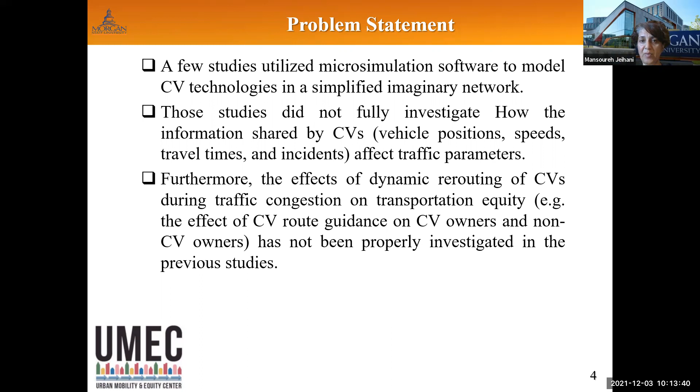So our objectives are to develop, and we already did, and calibrate a microscopic traffic simulation model in AIMSUN traffic simulation software to replicate a fairly realistic behavior of CVs in the traffic simulation environment. Driving behavior of CV guidance with various market penetration rates, from 0% all the way to 100%, and various traffic conditions is simulated, and the system-wide effect of CV-equipped vehicles with route guidance features on mobility and equity is analyzed.

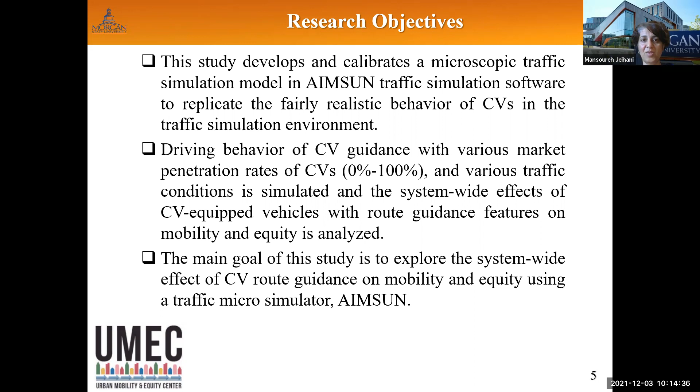And we need to mention that the main goal of this study was to explore the system-wide effect of CV route guidance on mobility and equity, and we used AIMSUN traffic simulator. So now the literature review, my PhD student Ali Reza is going to present.

Hello, everyone. Regarding the literature review section, more than 95 references regarding connected vehicles' effects on traffic parameters, emission, and equity were reviewed in our research. Various scientific databases were considered. All the relevant studies after 1990 were reviewed. The objective, methodology, outcome, and gap of each research were determined. And finally, based on the previous studies, a new methodology for analyzing network-wide equity was proposed. Please, next slide.

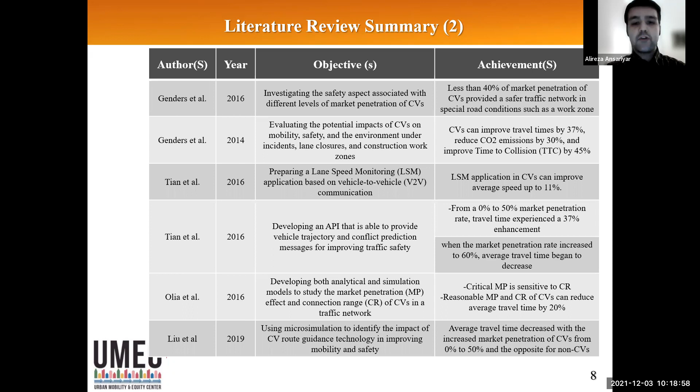Finally, after reviewing the mentioned studies, the following limitations were extracted from the previous studies. Market penetration rate and information update intervals were just considered, and gradual deployment of market penetration rate of CVs and information update intervals, for example, different time intervals for updating the average travel time on the network, such as 30 seconds, 1 minute, 2 minutes, 5 minutes, has received less attention. In our research, sensitivity analysis of network-wide level average travel time was investigated through different time intervals.

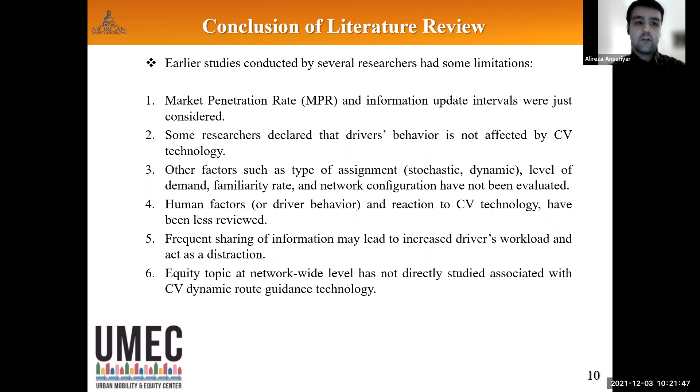And the main achievement of our study is investigating equity at the network-wide level. It means that different total volume demand matrices were considered. The network-wide level changes of average travel time with gradual deployment of market penetration rate of CVs from 0% to 100% were analyzed in our research.

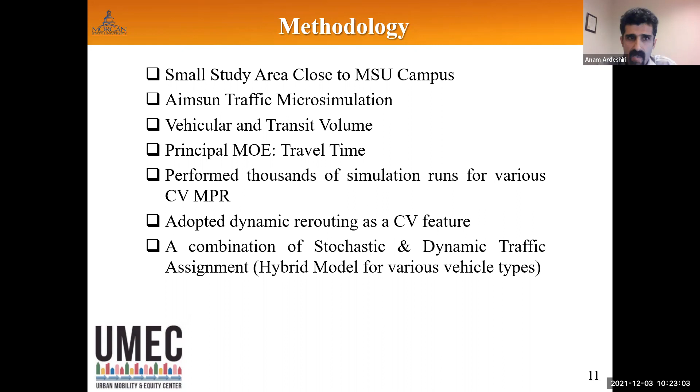To evaluate mobility and equity, we focused on travel time as the main measure of effectiveness in this analysis, and I'm going to share the outputs with you. To achieve our objectives, we ran thousands of simulation scenarios and analyzed them, and you see some of the reports here. I'm going to talk about our dynamic rerouting feature to mimic the CV cars in our network, and the traffic assignment methodology that we use for our CV cars and non-CV cars, which happens to be a hybrid approach of stochastic and dynamic assignment.

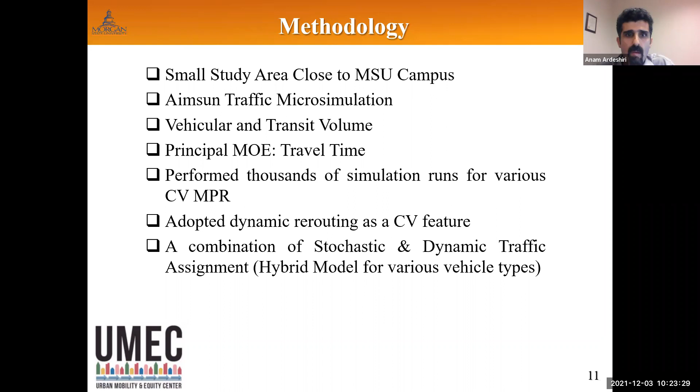So this slide shows our network, which consists of 3 north-south corridors and 2 east-west corridors, total 6 intersections, all unsignalized. Also, we collected real-world data like traffic counts, traffic control information, or traffic volumes. We tried to mimic a real-world condition to see what happens to the network when we have an incident in our major corridor here, which is the middle north-south corridor, The Alameda. And we tried to simulate one of the peak hour conditions, which is the AM peak, and southbound directions carry heavier traffic in the AM peak.

So the incident that we simulated in our network to evaluate the non-recurrent traffic condition was of 15 minutes duration, which closed both lanes of southbound Alameda, the middle corridor in this picture, for 15 minutes. And after that, both lanes were open to traffic.

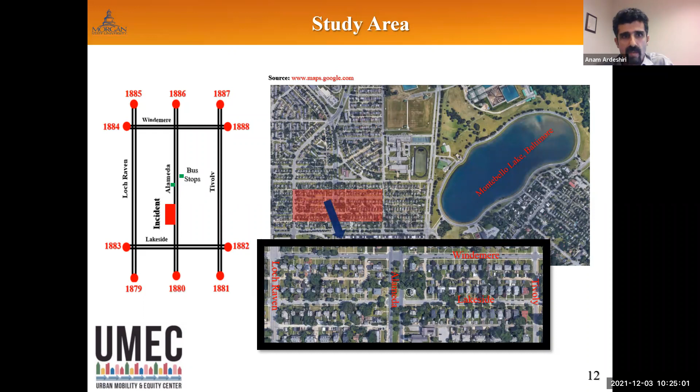You see a couple of bus stops, and we have bus traffic only on Alameda Street. So a little bit more characteristics about our network and roadways. As you see here, Alameda is the major one with 45 miles per hour speed limit and 1,800 passenger car per hour per lane capacity. These are the inputs that we needed to put in AIMSUN to code and calibrate our network.

East-west corridors are minor or side streets, so they had two-way stop control when they hit a major corridor. So Alameda, Loch Raven, and Tivoly, our north-south corridors, had right-of-way, and they had free movement when they approached these unsignalized intersections. The speed limits and capacity for the minor roads are shown here. And we try to have a mix of roadways so we can better show the diversion behavior when the incident happens in Alameda. So the diversion pattern is not uniform across the two parallel alternatives.

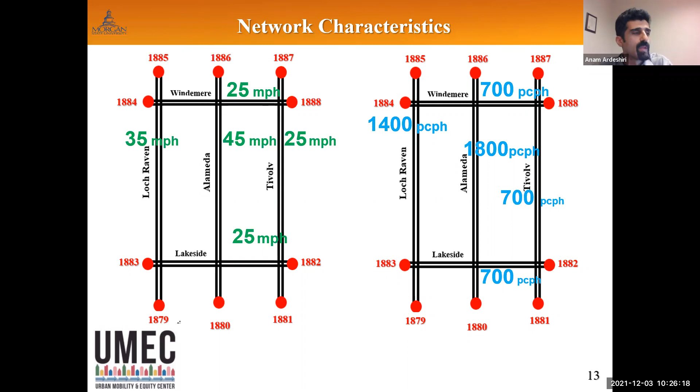As you saw in the past slide and in this slide on the left side, we defined 10 nodes for the network to be able to generate traffic volume. So with 10 nodes, we can potentially have a 10 by 10 or 100 cells in a trip table matrix. But we only decided to fill in 15 cells out of this big trip table, to simplify the network and our analysis to avoid any crash or slowdown of our simulation model when we wanted to run thousands of scenarios.

And we realized actually that incident and CV penetration rate is not going to impact that much the northbound traffic flow, the opposite direction of incident and the opposite direction of peak hours. So we didn't want to add traffic a lot to those northbound corridors. So we focus on our major corridor and the major direction, which is the southbound. And overall, we had 2,400 traffic volume per hour in our peak hour analysis.

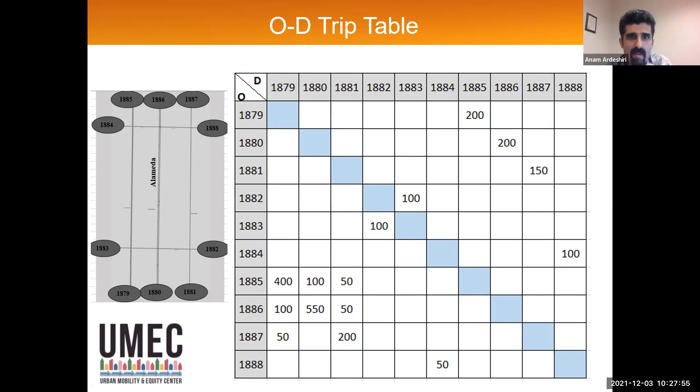To achieve our objectives, we defined 15 scenarios to gradually show the impact of increasing CV penetration rate on travel time, on transportation mobility and equity. We started with the base scenario, which I'm showing you as scenario number 1 here, when there was no incident and the network was in stable condition. And all of our vehicles were non-CV cars, or conventional vehicles. So we wanted to have a benchmark and base travel time to evaluate the change.

In scenario number 2, we added the incident, as I said, for a 15-minute period in one corridor, southbound direction, the heaviest traffic volume. And after 15 minutes, it was cleared, so both lanes were open. Still in that scenario, we had 100% of our vehicles as conventional, so they would use a static traffic assignment to get to their destination from the origin.

And from scenario number 3 all the way to 15, we gradually added 10% CV cars in the network, basically replaced 10% of those non-CV cars with CV cars. So the total volume didn't change. We kept the total volume the same, and we only performed 10% gradual deployment in the CV market, from, as I said, 0% to 100% in scenario number 14.

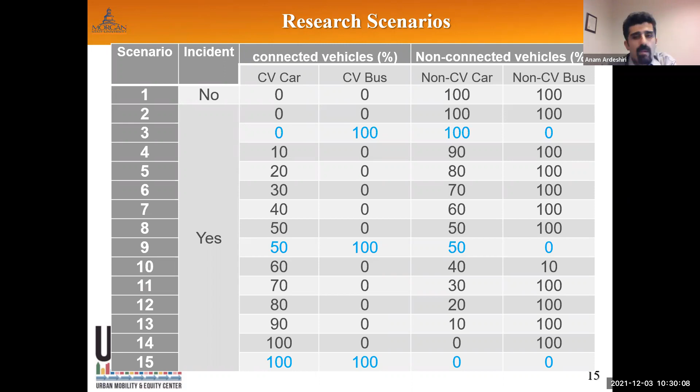Let's go over our methodology a little bit. So as I said, we had both CV cars and non-CV cars in our network. Non-CV cars, the conventional vehicles, always go by the static assignment and the shortest path algorithm. They're not going to get real-time information to update their route. However, our CV vehicles, as we expect in the future, are going to receive real-time information about link travel time. So if an incident happens, they can reroute and find another path that is going to get them to the destination quicker.

To communicate with our connected vehicles, we use the assumption that every 30 seconds our link travel time is going to get updated, and connected vehicles are going to receive that updated travel time information every 30 seconds to reroute if needed. We performed some sensitivity analysis over this parameter, let's call it information dissemination rate, which I'm going to show you the results of later. But 30 seconds was the base value we used. So our connected cars are going to be updated with the travel time down the road every 30 seconds.

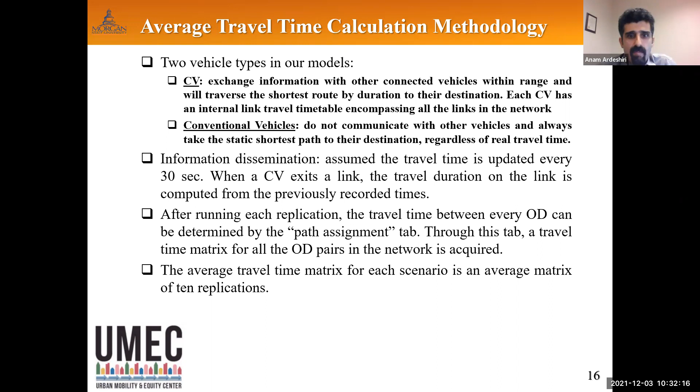So as Dr. Jeihani mentioned, we know that when we deploy more CV in the network, they're not going to only try to shorten their travel time, but there is going to be impact, usually benefit, to other vehicle types and non-CV users, for instance, non-CV cars or transit riders. And in this study, we are going to evaluate that impact on traffic, on our vehicle types, CV cars, non-CV cars, and buses, by mode and by scenario.

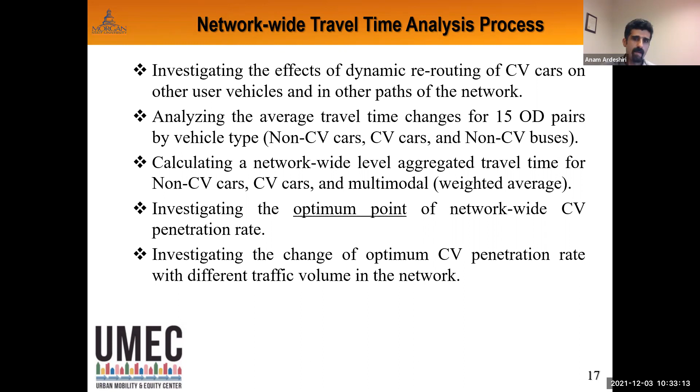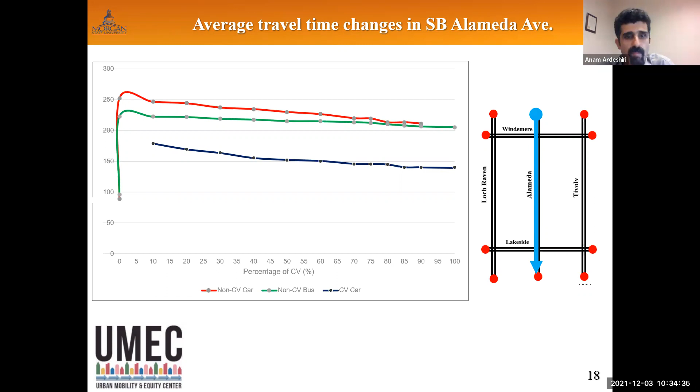And then as soon as we introduce connected vehicle technology and replace the conventional cars with connected cars, we see that travel time improves not only for connected vehicles, but also for non-connected vehicles. For non-CV cars and buses, it gradually decreases as CV penetration rate goes up. However, the difference between CV car and non-CV car travel time is really significant. So they were getting much more benefit.

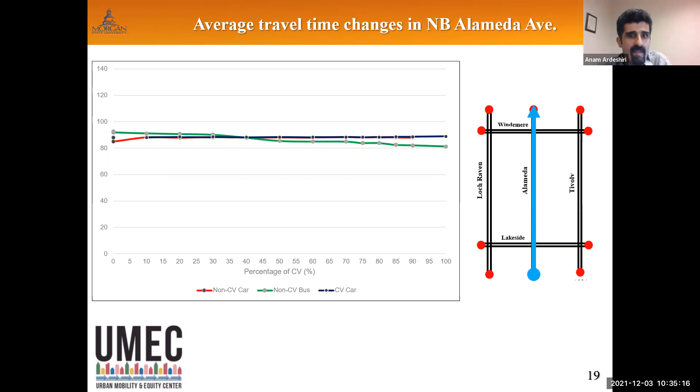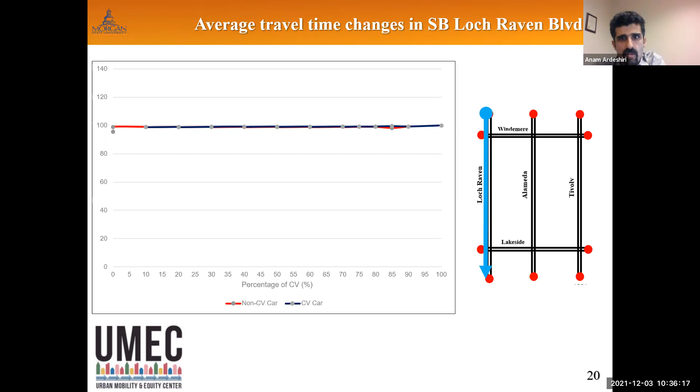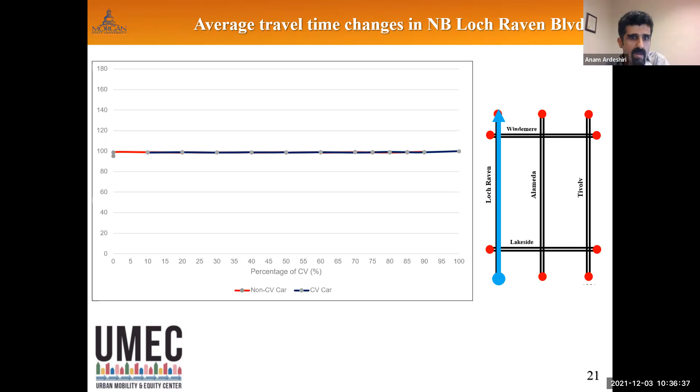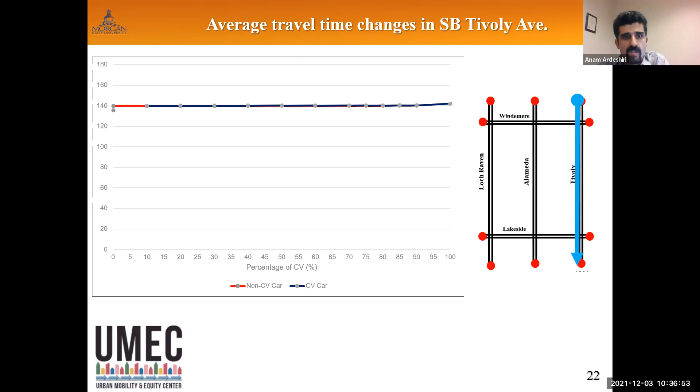Northbound Loch Raven. As expected, there's no incident, and this is the off-peak direction, so we expected to see no changes between CV cars and non-CV cars. The second alternative that we expect traffic to reroute to is Tivoly on the right side. And again, no major impact here. I just want to share this as expected. Northbound and southbound direction, the CV car and non-CV car graphs kind of overlap.

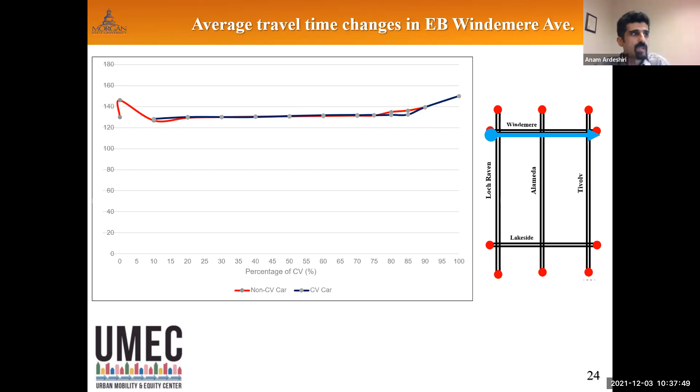Now let's shift gears to east-west corridors. Windemere is the top corridor, a two-way corridor. We're looking at the eastbound direction now. As you see, when the incident happens, the red line, there's a jump in travel time. It is probably due to the fact that those intersections are being blocked by major routes like Alameda. The traffic normally backs up to that intersection, so it slows down the movement, and the minor corridor traffic has a hard time finding a gap to cross because they have to stop.

Let's look at the opposite direction, westbound. Here, the change is even more significant. And the surprising thing is we see an increase in travel time not only for non-CV cars, but also for CV cars, which is something we don't like. But the fact is, these smaller streets are much more sensitive to traffic conditions, so they get really impacted when traffic is rerouted or diverted from Alameda to other parallel streets like Loch Raven and Tivoly. That brings congestion to this small side street, and the traffic on this street that wants to go straight suffers from that extra traffic.

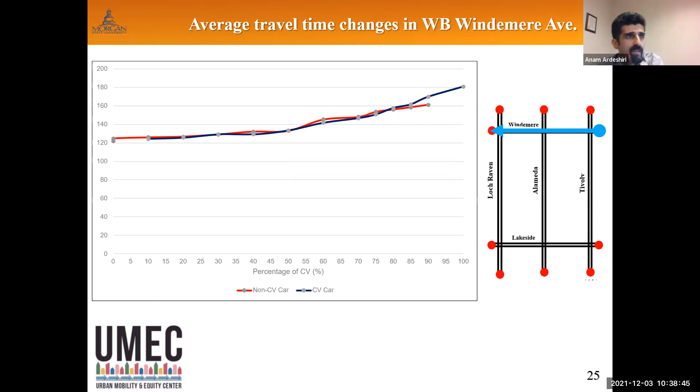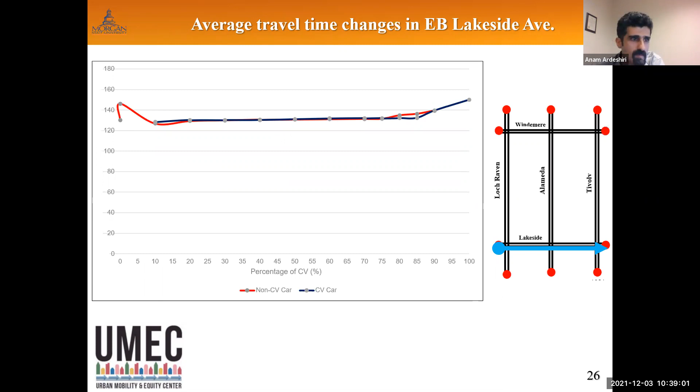The bottom east-west corridor, which is Lakeside, eastbound direction, shows a pretty similar pattern as we saw for Windemere. Now let's look at the westbound direction. And again, you see a real anomaly when the CV rate goes really high. So it shows that increasing CV penetration rate is not necessarily going to help. We saw it benefited the main corridor, Alameda, where the incident was, and that was a major corridor with higher volume. But for this minor street, it is definitely not helping.

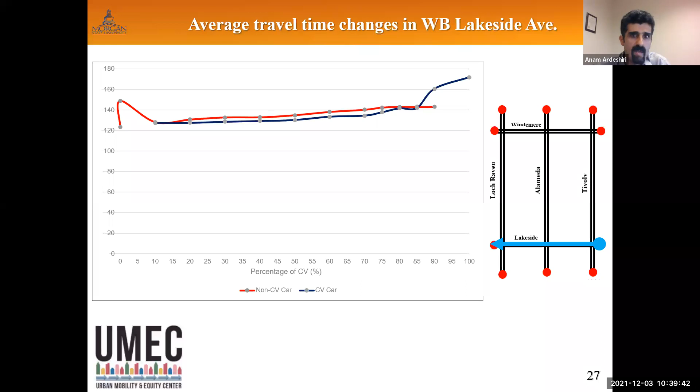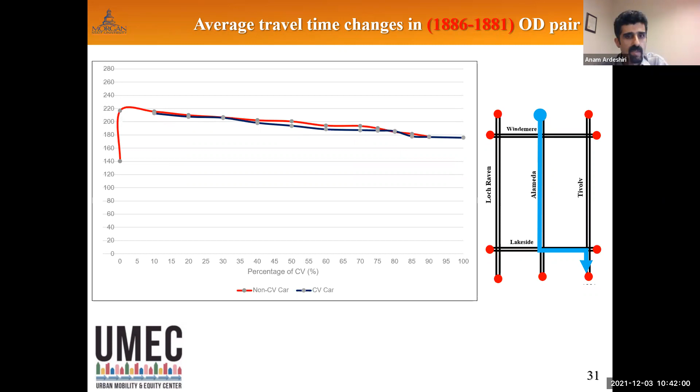From Alameda to Tivoly on the southeast corner of the network, again, we see overall improvement for both CV and non-CV cars. Another route from northeast to southwest corner. These routes, they don't have a lot of traffic, but we wanted to show them as they would impact the average network-wide analysis and to better understand the diversion behavior here. Again, we see improvement on both corridors. So CV deployment is helping. But again, after 85%, it looks flat. We don't see major change to travel time. So the majority of change is happening between 40% to 80%.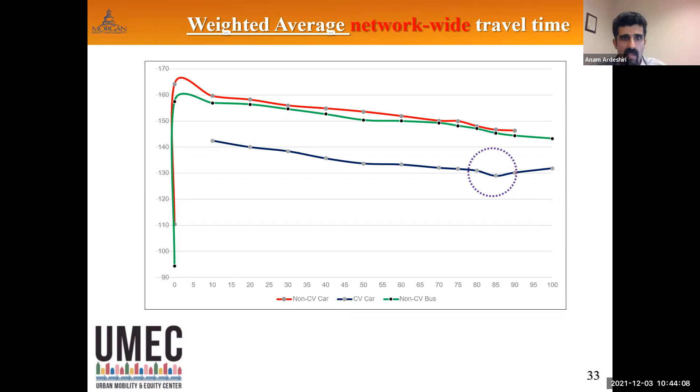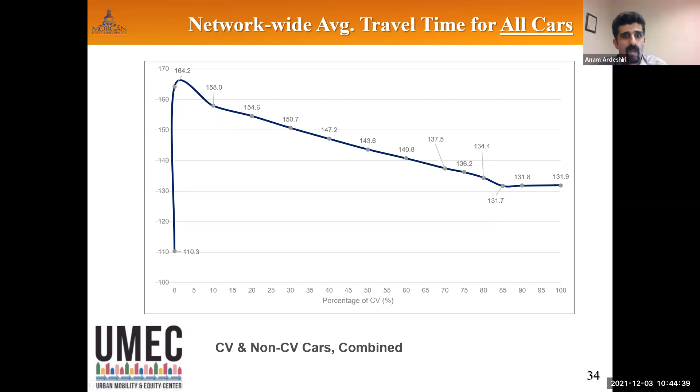So we combined CV cars and non-CV together. And in this graph, you're seeing the average weighted travel time, because our number of CV and non-CV cars were different in each scenario as we were replacing non-CV cars with CV cars. And again, you see that minimum happens at around 85% penetration rate, which is an important finding in our study.

And when we added transit to it and did a multimodal analysis, we found the same pattern. So in this chart, we made some rough assumptions for ridership for our transit system. As I said, we had 3 transit lines altogether, I would say 13 buses per hour each direction. And we made some assumptions and we performed some sensitivity analysis, but I'm showing just a base model here, which is consistent with the car analysis in the past few slides, the optimum point of around 85% network-wide.

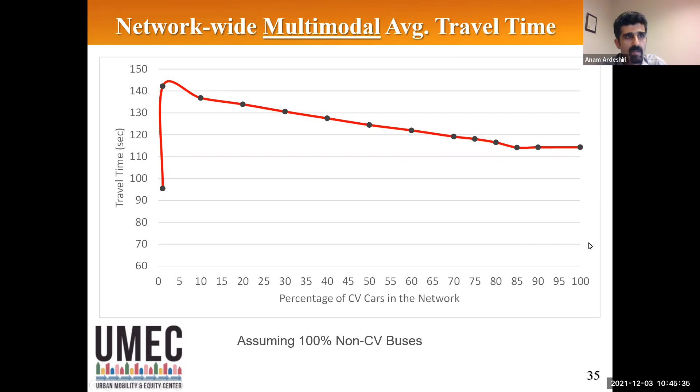So now let's do some sensitivity analysis to be able to generalize our findings. And mainly the sensitivity analysis was over traffic volume and the traffic information dissemination rate. The focus here is just the main route where we have the incident, which is southbound Alameda, OD 1886 to 1880.

So let's review the base chart together again. So we are showing 3 different vehicle types: non-CV cars, CV cars, and non-CV buses. And we played with the traffic volume of the network, not only for this corridor, but the entire OD. We added 20% and reduced the volume by 20% to see how the relationship between these 3 charts changes, or if there's any change in the pattern, in the minimum.

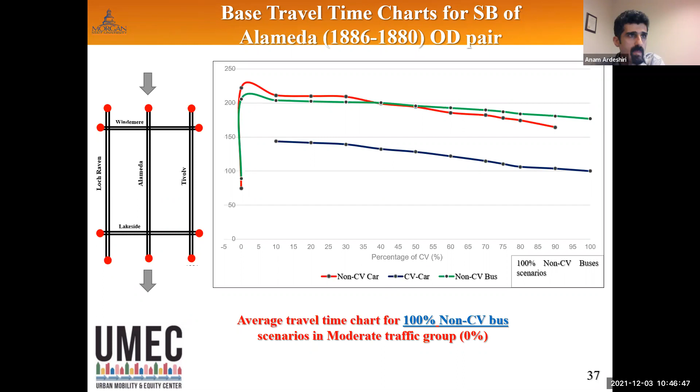So let's look at the non-CV cars. So we're showing by mode. Non-CV cars: the orange line is the base traffic condition, and the gray and blue lines show the change in travel time when we add or reduce 20% of traffic, which is pretty consistent. Also, the gray line shows more significant changes, and it seems it's shifting the optimum point a little bit.

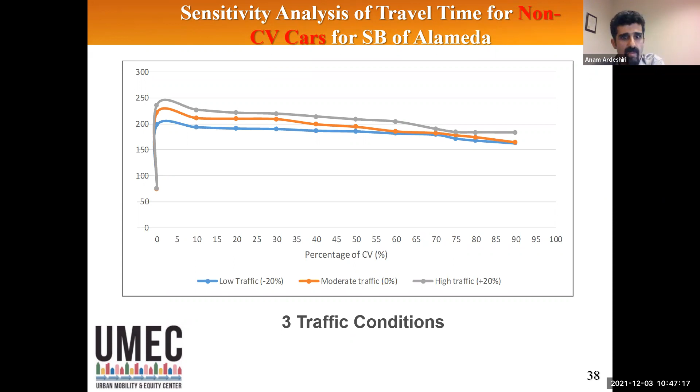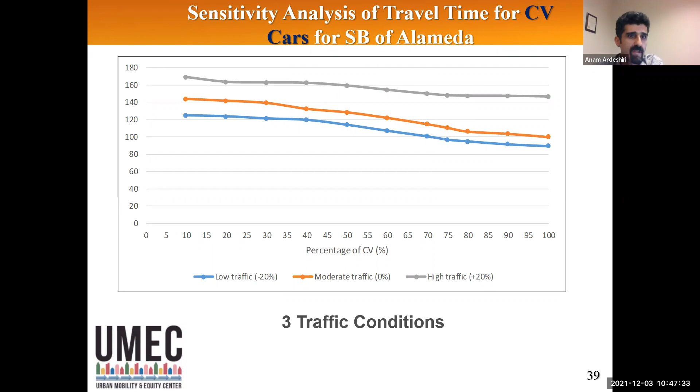CV cars, the same. Again, adding traffic, it seems it's more significant, and it is limiting the benefit that you're getting from CV penetration rate or CV deployment. Non-CV buses, again, adding or reducing traffic is expected. We are seeing expected results in travel time. And also for the higher traffic, it's overlapping the base traffic when our penetration rate is over 85%.

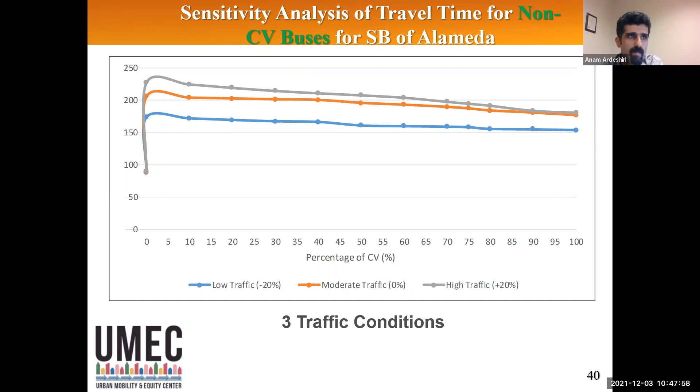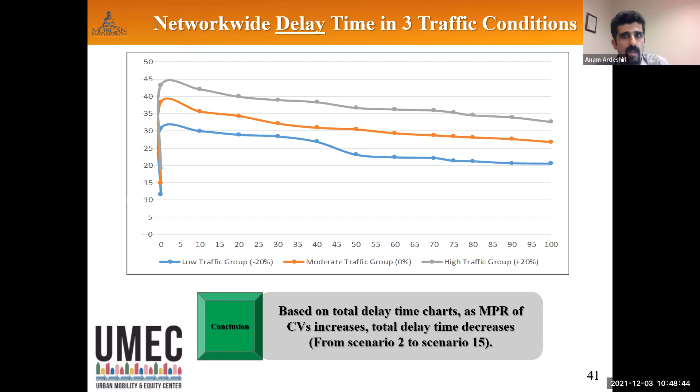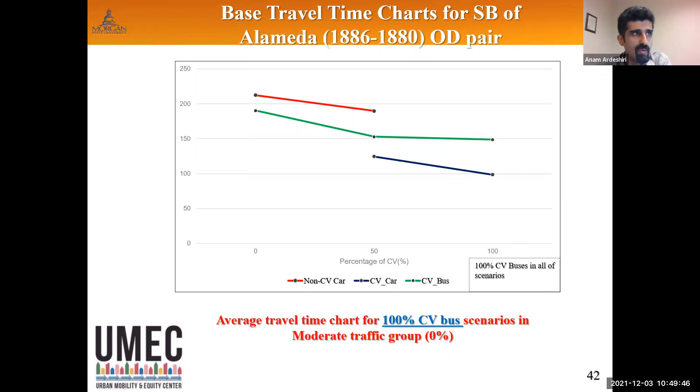As expected, travel time gets improved when we add more CV cars. But let's focus on CV buses only and evaluate that by the change in traffic volume. That's pretty consistent with what we saw when we had non-CV buses. Also, the overall travel time is slightly better, but the relative travel time is showing the same pattern as we improve CV car penetration rate.

One other important finding I was going to share here is the change to the optimum CV penetration rate when the traffic volume changes. So we did this analysis to see what happens if the network shows different time of day traffic levels, like peak hour, non-peak hour. So as you see in this network, when total traffic volume goes up, the optimum point of CV penetration rate, which means the point that our network-wide travel time is minimum, is decreasing. Remember, we had 85%, and as you see here, it goes down even to 50% when we add more traffic and we get closer to network saturation, which kind of makes sense.

This is the same concept we see in our adaptive signal system. As you know, when our network is oversaturated, deploying adaptive signal system or fully actuated is not going to help that much because you don't have enough room to play with it. And here, this is the same concept. When a network gets congested, all roadways, there are not a whole lot of options for CV cars to reroute and improve their travel time. So they're going to pretty much behave the same way that non-CV cars are behaving, static assignment to the destination.

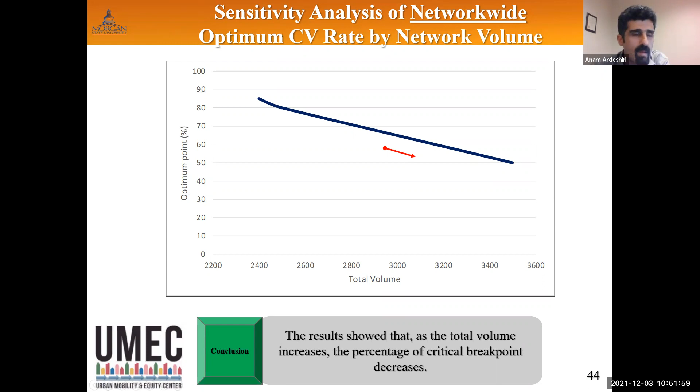And the last type of sensitivity analysis we performed was over the rate of information dissemination. How quickly CV cars can receive updated travel time to make better decisions, to get to their destination faster. So this kind of mimics how quickly CV cars receive the updated travel time to avoid the congested route and possibly reroute. This graph shows 3 different scenarios: 30 seconds interval, which was the base interval we used for information dissemination, 2 minutes, and 5 minutes. How CV cars travel time can change.

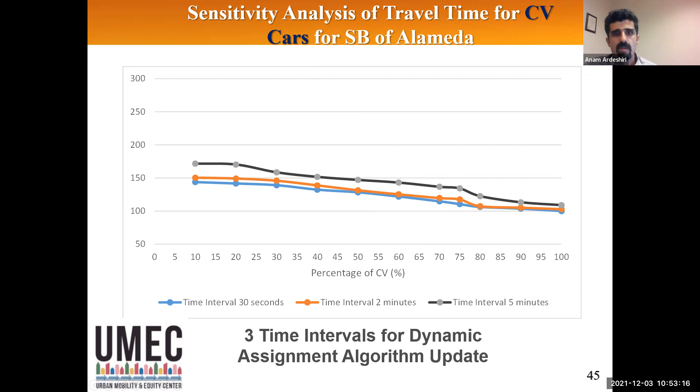As you see, it significantly increases travel time if they get notified at a slower pace. So the 5-minute interval, the black line, is on top of those two, which means that the benefit of CV penetration overall decreases when our travel time dissemination interval increases. Even worse for non-CV cars. So non-CV cars suffer even more from the information dissemination rate if it gets slower. If CV cars don't get notified quickly enough to reroute, they're gonna stick to the congested route and make that worse for themselves and for non-CV cars.

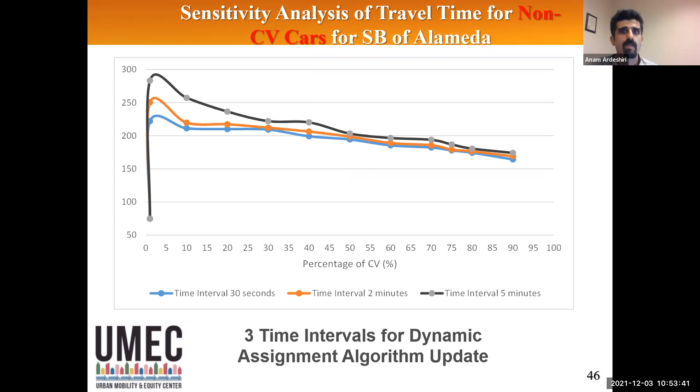Let me talk a little bit about our dynamic rerouting analysis and the methodology. The methodology is pretty much the same as I talked about earlier. So as I said, non-CV users were statically assigned to the network. However, our CV cars were dynamically assigned. By dynamic assignment, I mean that travel time, link travel time and the link cost function were being updated every 30 seconds. So they could reroute and improve their travel time.

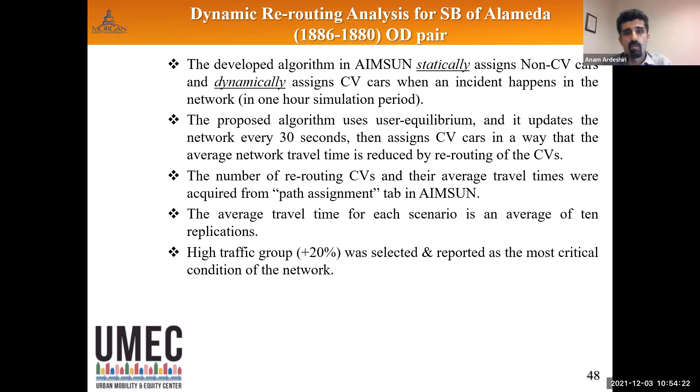So the base demand for this OD, southbound Alameda from origin to destination, was 550 cars per hour, which in the first scenario were all non-CV. And gradually, we changed the configuration and the distribution. So this blue line, let me explain this. When we say 10% scenario, it means that out of those 550, 55 of them, which is 10%, are CV cars, and the remaining 495 are non-CV users.

And then when we looked at the output of the simulation, basically the average of 10 runs for each scenario, this was the diversion pattern. So out of those 55 CV cars, 45 stayed on their route, which is basically the typical shortest path when the incident didn't happen. And this is the same route that all non-CV cars are going to take. However, 10 of them rerouted and decided to use either Loch Raven or Tivoli. Distribution here is 7-3 because Loch Raven has more capacity.

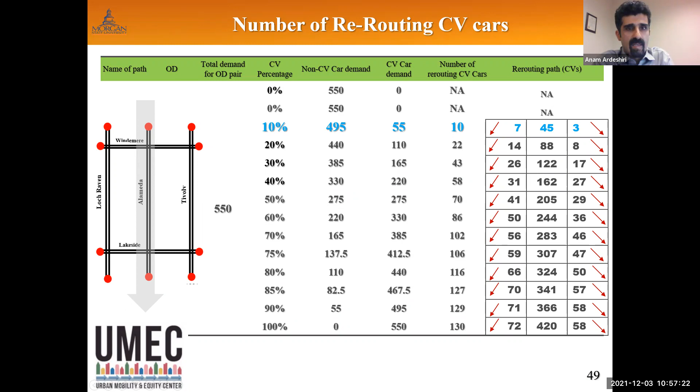We have shown them in graphics, so I'm just going to quickly go over these 10 scenarios. So this is the base scenario we went over together. Out of those 55 CV cars, 45 stayed there, and then 10 diverted, 7 here, shown in green, and then 3 CV cars used the blue line and Tivoli, made another right here, and came back to the destination.

So the point here is, using the user equilibrium concept, the travel time on all of the routes should be similar. Basically, the principle is no single user can change his or her route to make it faster. So as you see, travel times are kind of equal in all 3 alternatives. And it's the same concept for all scenarios. Travel time is going down because more CV cars can reroute and find a better path. However, it's the same for all alternatives, like here, 164 seconds almost.

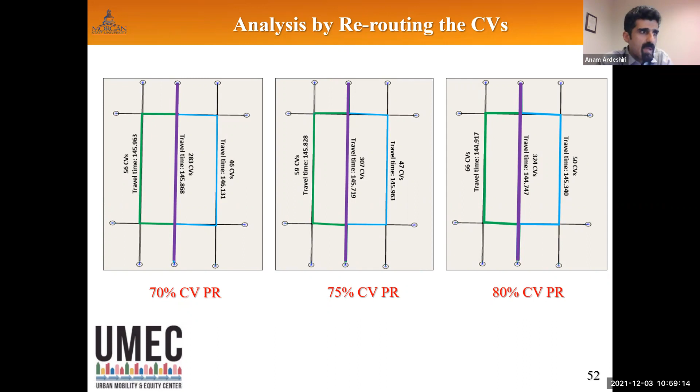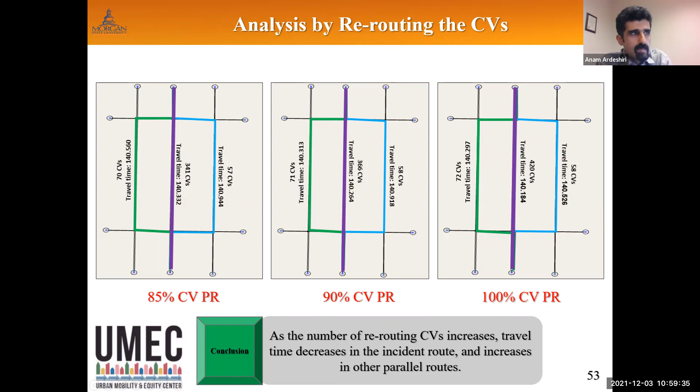We investigated a couple of transit scenarios. Basically, we explored how we can improve conditions for transit riders with CV technology in this environment. Since we didn't have traffic lights, we couldn't analyze transit signal priority strategies. So we focused on the dynamic bus lane, which is a very common and popular strategy these days across American cities, repurposing one general purpose lane for buses only. We call it either dynamic bus lane or dedicated bus lane. But a dynamic bus lane is when you use that lane for transit only at certain hours of the day, like peak hours or incident hours.

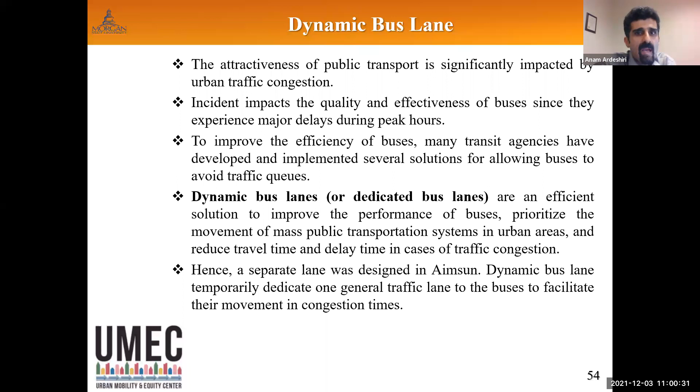So here for our network, if you remember, we had two lanes on southbound Alameda, and when the incident happened, both lanes were blocked. So we decided, for the duration of the incident, to repurpose the right lane for transit, basically bringing transit vehicles ahead of traffic so they can bypass the congestion when everything is clear.

We ran two scenarios to evaluate the impact of the dynamic bus lane. In the first scenario, as soon as the incident happened, we repurposed the right lane for transit for 15 minutes, the exact duration of the incident. And then after 15 minutes, the lane went back to its main purpose for general traffic, so all other CV cars and non-CV cars could use the right lane. And in our second scenario, we extended the bus lane for another 15 minutes after the incident was over, basically 30 minutes total, to clear buses faster than cars.

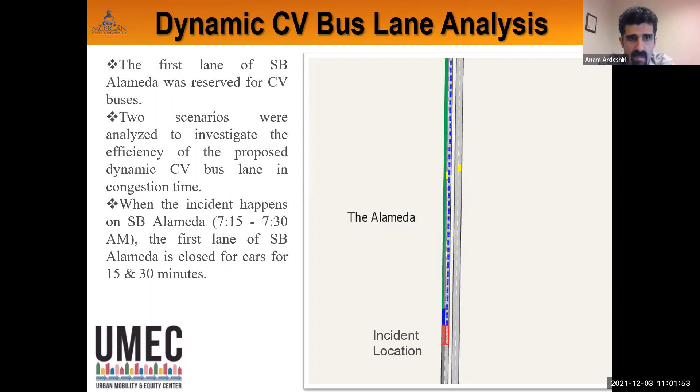And we evaluated bus travel time in both scenarios, where you see the results here. The blue line is the base condition when we didn't have a dynamic bus lane, so buses would be stuck in traffic like other cars in the middle of the road. But then the red line shows the 15-minute dynamic bus lane, and the black line shows the 30-minute dynamic bus lane. And you see significant improvement, I would say at least 15% reduction in travel time as a result of adding the dynamic bus lane, which is a significant improvement.

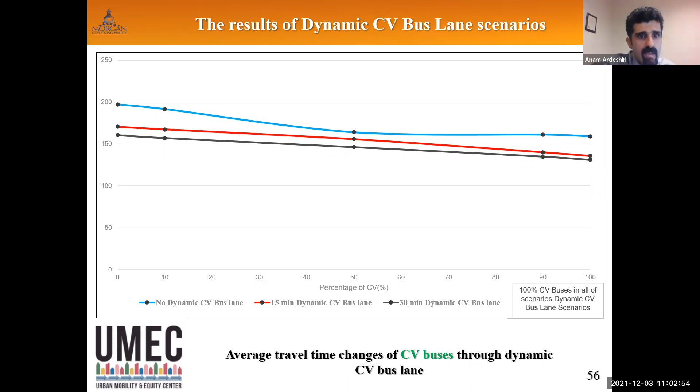So again, this was a dynamic improvement, and as soon as the network was back to normal condition, the bus lane was over. So it requires ITS equipment to notify drivers and bus drivers of this lane purpose change.

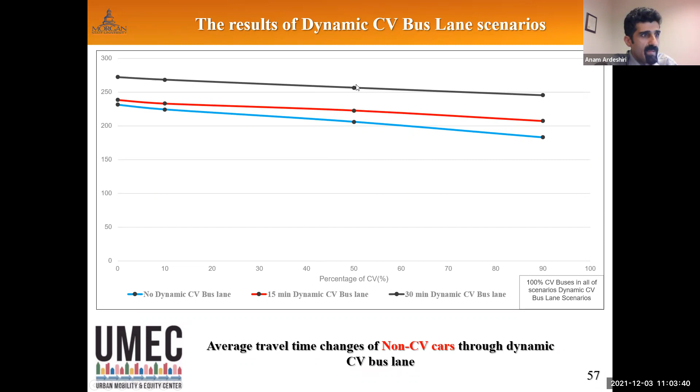Now let's evaluate the effect of the dynamic bus lane on other modes of traffic, like non-CV cars. As you see, non-CV cars' travel time is getting worse when we apply the dynamic bus lane. The blue line is the base condition, and when we add the 15-minute dynamic bus lane, travel time for non-CV cars goes up, and then another increase when we extend the dynamic bus lane. And as expected, this is the same case for CV cars. So this strategy is mainly helping transit users.

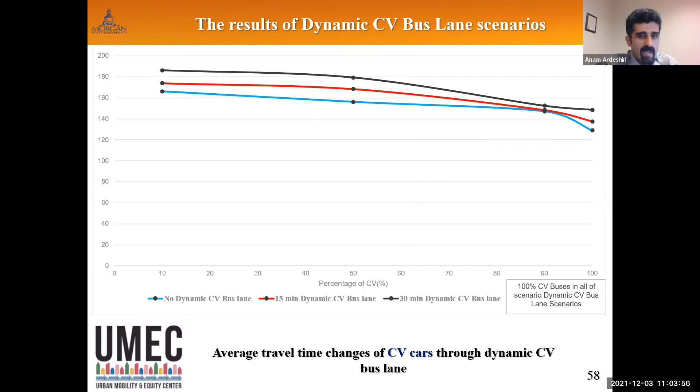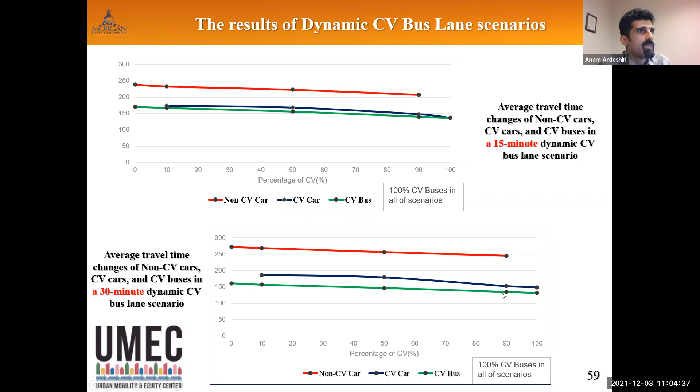And with that said, I'm gonna turn it over to Dr. Sadeghvaziri for emission analysis.

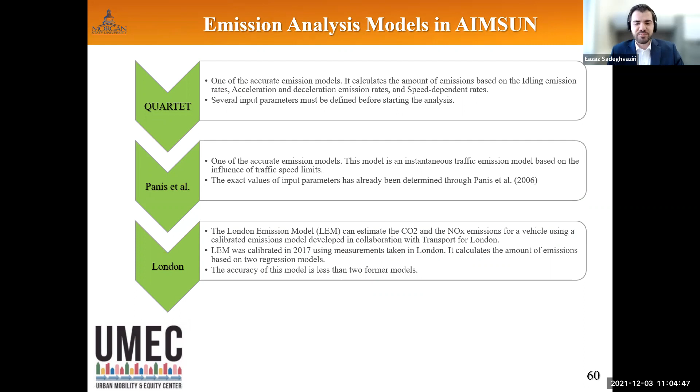Thank you, Dr. Ardeshiri. In the next few slides, I'm gonna go through emission analysis models in AIMSUN and our conclusion. Basically, AIMSUN has three main emission analysis models: the first one is Quartet, the second one is PANIS, and the third one is the London Emission Model, LEM. Let me go through each one very briefly and say which one we chose eventually. Quartet is one of the most accurate emission models. However, it needs all the information at the very first step. It requires several input parameters that you need to define. It provides the emission based on idling emission rates, acceleration and deceleration rates, and speed-dependent rates. It has its own benefits and its own downsides.

Another one is PANIS. PANIS is one of the most accurate ones. It's based on the traffic speed, and the good thing about this model is that the exact values of the input parameters have already been determined by PANIS. And the last one is LEM. The London model can provide carbon dioxide and NOx emissions very well. However, it was based on London and developed in 2017, so if you want to use it here, you need to calibrate it. Also it's based on linear regression models, and it's not as accurate as the previous two.

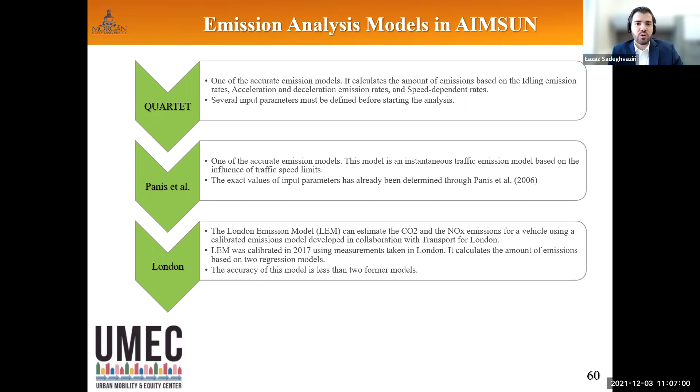So after a thorough investigation for our network, we chose PANIS because it's one of the most accurate, and we also had the default values of the inputs for the emissions we were looking for. In this analysis, we wanted to look at four major emissions: PM, particulate matter, carbon dioxide, NOx, and VOC. We went through all of these one by one. If we can go to the next slide. If you want to read more about the variables in the PANIS model, you can refer to their paper published in 2006.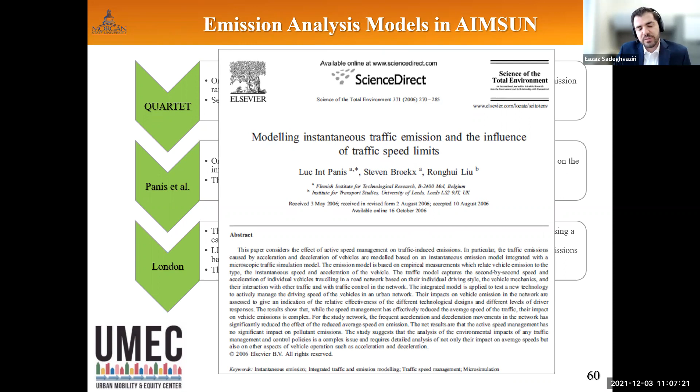In terms of the trend for carbon dioxide, we saw that as we increase the market penetration rate of CVs, going from scenario 1 to 15, the carbon dioxide emissions decreased. This is a fantastic finding, and it gives us very good insight that this is the future of road networks: the more CVs, the less emission. We looked at the other emission gases such as NOx and saw the same pattern, and the same for particulate matter and VOC. If we can go to the next slide, please.

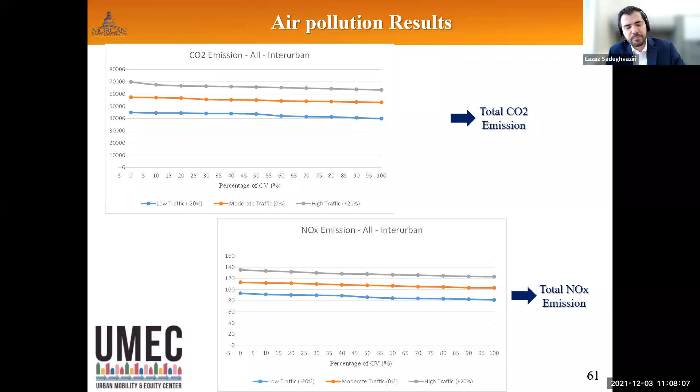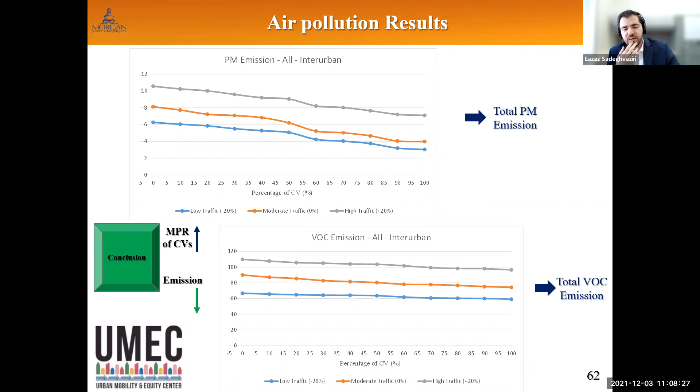All right, so now let's go to the conclusion of the whole study. We came up with 5 major findings. Let's first talk about what we have learned from the total delay. We understood that the total delay time can be improved when there are connected vehicles in the road network compared to when there are not. With the base volume, the total delay time improved by 20.6%.

When we have plus 20% traffic, the total delay time improved by 14.9%. And with low traffic, minus 20% of the base model, we have 21.2% improvement in the total delay time. In terms of emissions, we understood that with the low traffic volume, I mean minus 20% of the traffic volume,

for those 4 major emissions that we were investigating, carbon dioxide improved by 5.4%, NOx improved by 7.6%, PM improved by 26.7%, and VOC improved by 6.4%. We saw the same pattern with the base model, and even when we increased the traffic volume by 20%. This shows that the more CVs we have, the higher the market penetration rate of CVs, the less gas emissions.

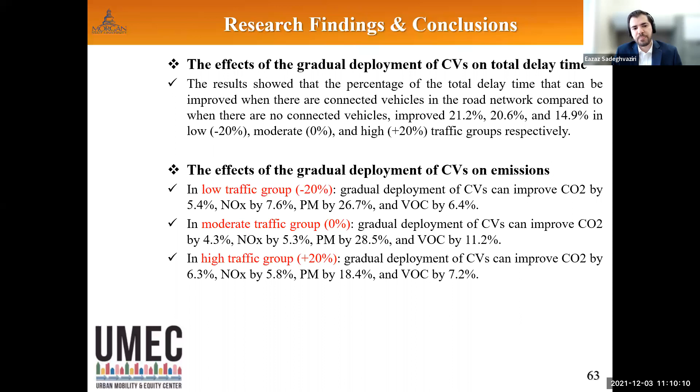And in terms of the dynamic rerouting that we investigated, we understood that once the number of rerouting CV cars increases, the average travel time in the rerouting path decreases. And we noticed that on average 25% of connected cars rerouted from scenario 4 to 14.

And in terms of the dynamic CV bus lanes, as Dr. Ardeshiri mentioned, we used a 15-minute dynamic CV bus lane, and the travel time improved by 11.9% for CV buses. Then we went one step further to see what happens if we increase the dynamic CV bus lane to 30 minutes. We noticed that the CV bus lane can decrease the average travel time by 16.4%. It means the more CV bus lane time we can allocate, the better result we can obtain.

And eventually, from the equity point of view, we understood that the weighted network-wide average travel time chart experienced a descending trend from 0% market penetration rate to 85%. The 85% market penetration rate was identified as the critical breakpoint for our chart. Beyond 85% CVs, the chart stabilized and only slightly increased. So we identified 85% as the breakpoint for our study.

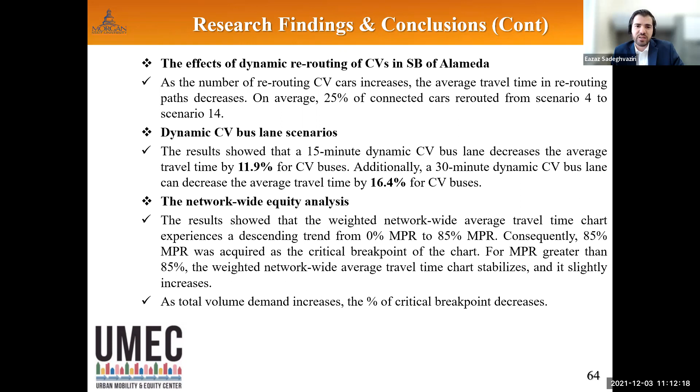Our work had some limitations that we can improve on in future work. First of all, although we used a fairly realistic, real network, the network was small, and we could increase it to an intermediate network size. We did not look at the real-world volume, distribution and composition of traffic on that network; we used hypothetical traffic parameters. However, we looked at low, medium, and high traffic volume.

Also, we did not have any traffic signals, partly because the network we picked did not have a traffic signal. But with a larger, more complicated network that includes traffic signals, we could look at transit strategies such as TSP and queue jumps. We can test those as well.